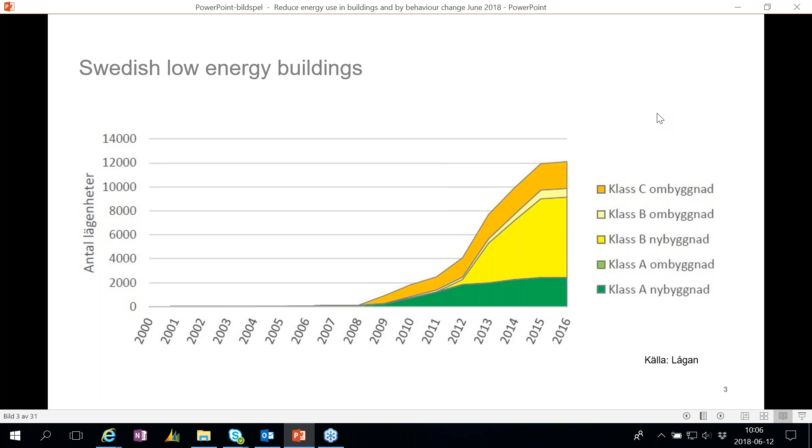The bright yellow and green here are A and B class new buildings, and when it comes to refurbishments, it's only a few up here. You can see it's a quite big increase, so you would think we are on our way, but if you compare that to the total amount of new houses, you can see it's only these down here that are actually new, low energy houses.

So only about 7% of all new houses built are being built as low energy houses. And of course, there is also the big part of houses already built, which will remain in the stock for another 50 years or so.

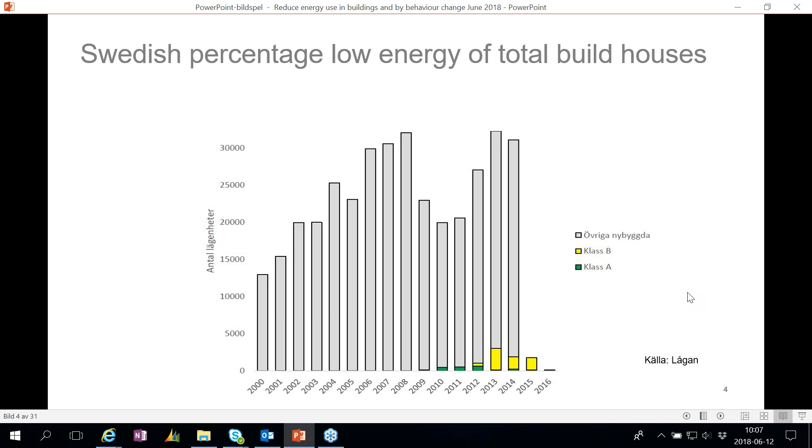We have heat exchange from the sewage water and a lot of new technologies. The passive house principle is actually from Germany from the beginning - you have well insulated walls and roof. You use solar both for solar heating to heat water, and directly in the winter - the architecture is made in a way that you can use the heat from the sun during the winter, but not in the summer, because then you need the shading, otherwise it gets too warm.

You use heat exchangers, so the heat from the ventilation air from inside is used again. You preheat the fresh air that comes into the building, and of course you use the heat from the persons living in the house, and lights, and stove, and everything.

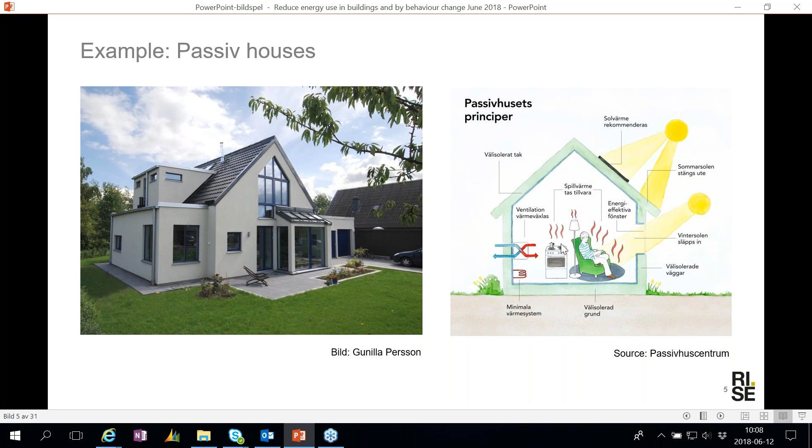But as I said, new building is one thing - then you have the possibility to make it right. The biggest challenge is of course the existing building stock, but it also has a big potential for reduced energy. So I'm just going to go through a few examples of what you can do in existing buildings to reduce energy.

The first thing is to look over the insulation, the walls and the roof, and to see if it's possible to add insulation. That can be done either by prefabricated building parts that you just add on the outside, or in other ways, site-specific ways of adding insulation.

Preferably it's done on the outside instead of the inside. That reduces the risk for moisture issues in the building.

Change the windows and doors - if it's old windows, that can be a very effective way to reduce energy use. And you would like to have as low a U value as possible. There are also actually ways to just upgrade current windows.

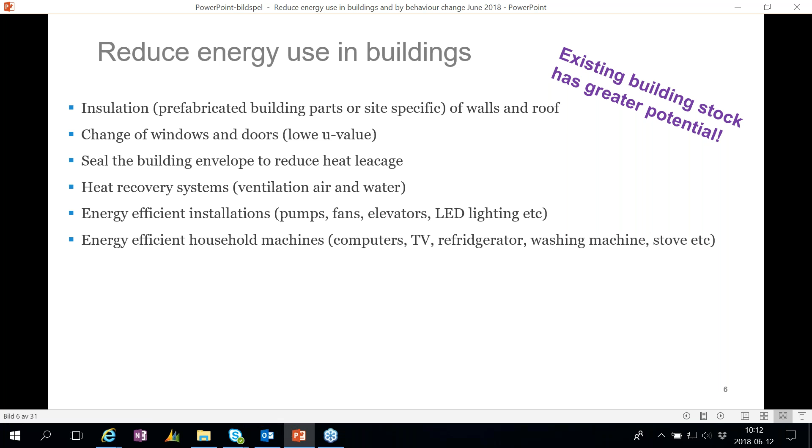Household machines - it's not always that the people owning the house are in charge of buying them, but when you buy new computers, TV, refrigerator, washing machine, stove, and everything, make sure that you choose energy efficient ones.

We talked about the insulation of the house itself, but you can also improve the insulation of the technical installations, like the water and ventilation pipes, so that you don't have energy losses in the wrong places within the building. The same thing with hot water tanks to store hot water for heating or showering - make sure that they are well insulated.

Monitoring and control systems are also ways to reduce energy use, to make sure that the right amount of energy is directed to the part of the building that needs it, and also to only use the energy when it's needed. The sensors are being better and better and cheaper, so quite a lot has happened on this part in just the last 5 years - it's actually easier now to monitor and get a good overview of the buildings.

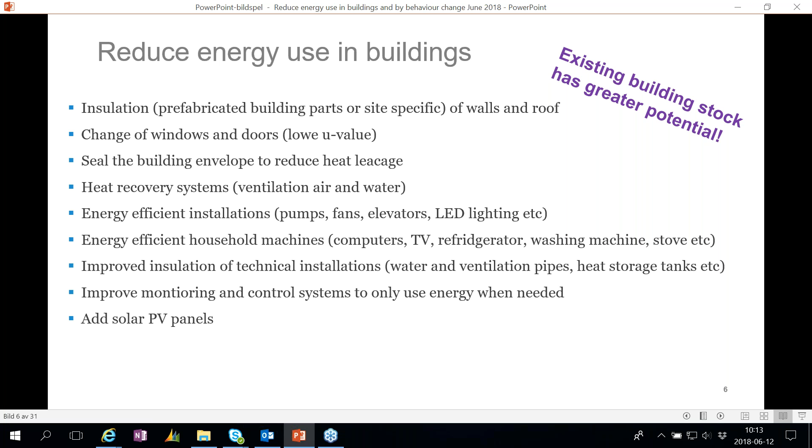And I also brought the PV panels. I know others are going to talk about PV panels later, so I'm not going to talk so much about that. I have two things that are really important when it comes to reducing energy use, and that is LCC and LCA.

I will start with LCA, which is life cycle assessment, and that is the total impact, the total environmental impact that a product or service has throughout the entire life cycle. That includes the raw materials, the enrichment of the raw materials, production, transport, use phase, and the recycling and the waste.

I think this is a very good thing to have in mind when you do an investment or choose something and compare different things, because one thing can seem to be a great environmental investment or installation, but if you look through the whole life cycle, it can actually mean that it's better to choose something else.

So bear in mind that you see the whole picture, and also think in the circular way. Is it easy to recycle? Is it easy to use the material again, and not just things that you have to throw away, that are really hard to recycle when they break?

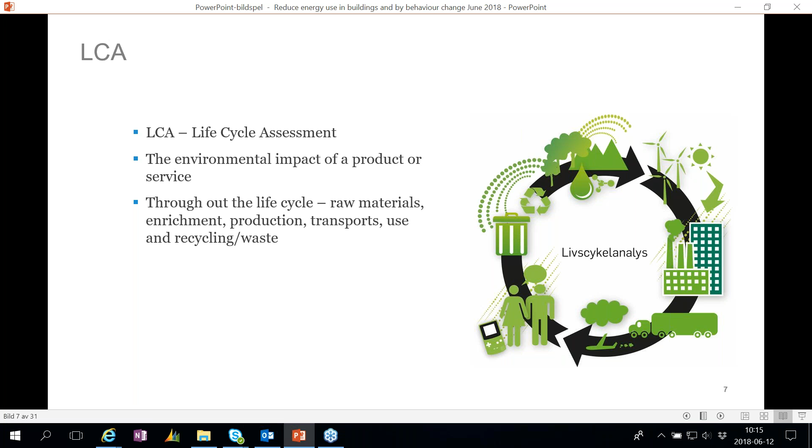The other part is life cycle cost, and that's a bit the same, but it's when it just comes to the cost, and that is the product or the service throughout the whole life cycle. This can actually be very important.

If I take the example of a pump, a water pump in a building that circulates the hot water, if you buy the cheapest one on the market because you don't want to spend too much money, and then you have a certain amount of energy used every hour that it is in operation, it will probably cost you more throughout the life cycle than if you would buy a bit more expensive pump in the beginning that has a lower cost per hour when you use it.

So always look through the whole life cycle, and this also includes the investment. You should also add education, services, repairs, and of course depending on your investment interest and payback and everything. So make sure you add the whole life cycle in your calculation.

This is to summarize a little bit about zero emission buildings. The first part is to use energy efficient and robust building construction and services.

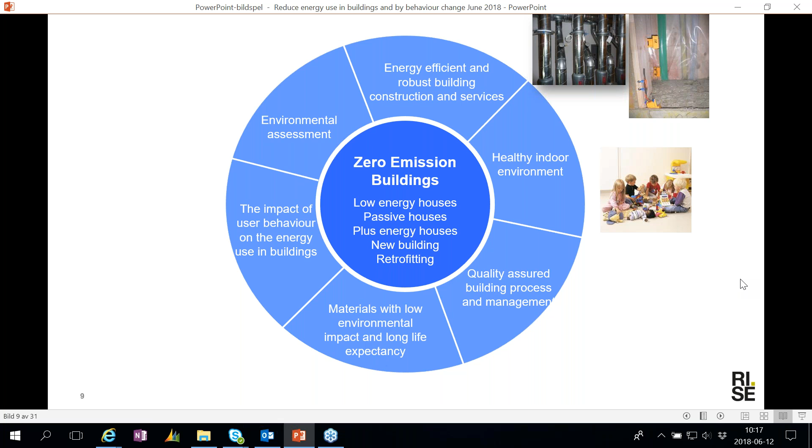To have a healthy indoor environment is a key element to zero emission buildings. You cannot reduce the energy by just making the house airtight if you don't add the ventilation. So to have a sound indoor environment is crucial.

One thing you should always think about is how to do the building process and management and the quality assurance of that process - to make sure to follow up if you set goals, how to follow them up during the building process, and also when the building is in use, how to make sure that you actually get what you wanted in the first place, to have a good solution for the building process and the management of the building.

When it comes to the materials, as I said, always look at the whole life cycle, the raw materials and the process, and how to be able to recycle them when they're out of use.

User behavior and the energy use in buildings, I will come back to that a bit later.

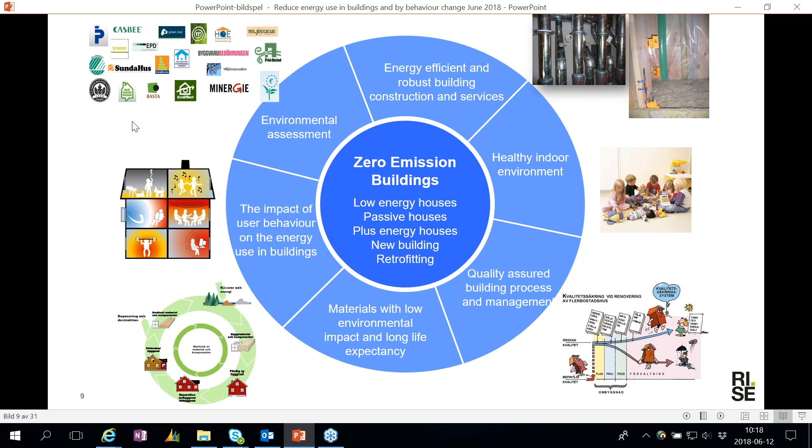I would like to give you an example of a project that we have done. This is a part of a city outside of Gothenburg called Kongahälla, and they wanted to see: is it possible to go from a low energy to a plus energy district?

This survey was actually done quite a few years ago, and now it's quite common to try to do this, but here they thought about how to use energy flows during the whole year by using solar, by using the excess heat from the grocery stores, from the cooling machines. You could add that to the district heating network and see how to move energy from different parts of the city to make better use of the total energy system, both heat and electricity.

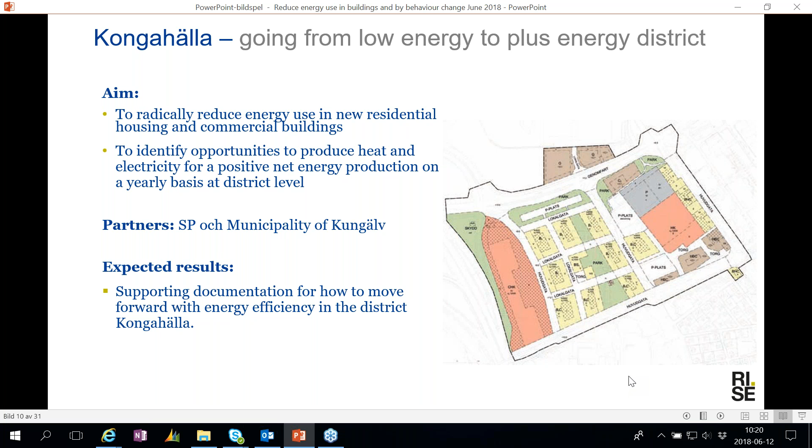So this is an example of how you can try to get a whole block of buildings to be more energy positive.

This is our research house in Borås, where we work. This is the main facility of RISE in the west of Sweden, and this house was built a few years ago within a research project. We have one building in Borås and one in Varberg. In Borås we have 4 artificial occupants, and in Varberg we have a family of 5 real persons. They are single family prefabricated wooden framed villas, designed to suit the Swedish market, so they are supposed to be energy efficient, but also cost effective and environmentally friendly. It was really important to have them attractive on the market too, so not too strange, so to speak.

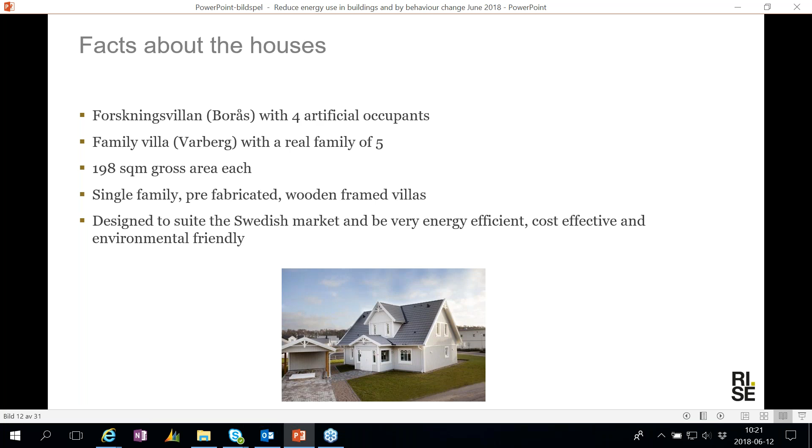We made some improvements on the building envelope compared to ordinary Swedish houses. This is the roof insulation, where we put some of the insulation on the outside of the wooden part of the roof. A lot of these improvements are to reduce energy use, but also make it more moisture safe. Since in Sweden we build a lot of wooden houses, moisture safety is really important for us.

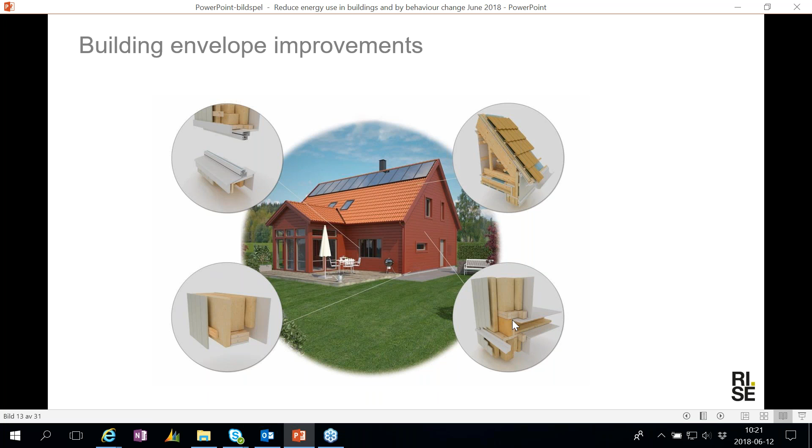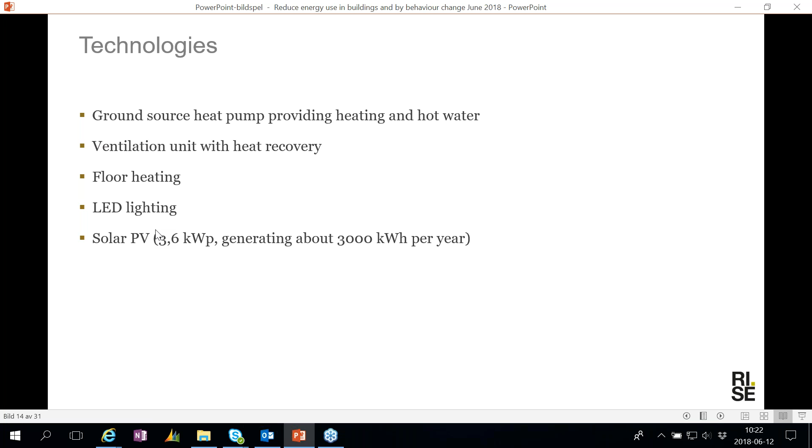We have a ground source heat pump providing heating and hot water. We have a ventilation unit with heat recovery that preheats the fresh air. There's floor heating, LED lighting, and solar PV that generates about 3,000 kilowatt hours every year.

What you can see here is that if you compare to a standard house in Sweden, we managed to reduce the annual energy use by as much as 73% compared to a standard house in Sweden. And the emissions were 735 kilograms of CO2 equivalents, with an 11 year payback time for these extra investments in energy efficiency.

This house will probably be functional for at least 50 years, so after just 11 years it's paid back.

Pretty much the same in Varberg, with a little bit higher energy use than in Borås. So 68% lower energy use, but also an 11 year payback period.

The lessons learned from this actually connect very well to the next part of the presentation: user behavior was a key point in low energy houses, and it can have a big impact on energy use. There was one event where they changed a setting on the ventilation unit, and that made the energy use skyrocket for a few months before we realized what had happened. So the technique has to be really user friendly, and the users have a big impact on how the total energy use in the building ends up.

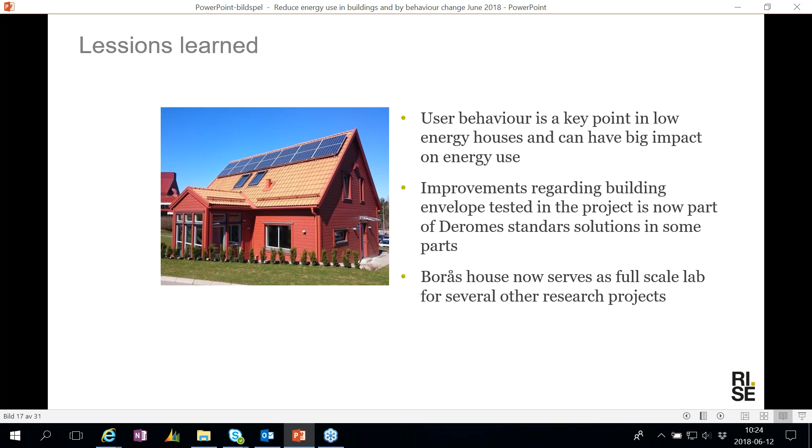Okay, so that was my first part, on the reduction of energy use. Should we give the opportunity to ask some questions or comments?

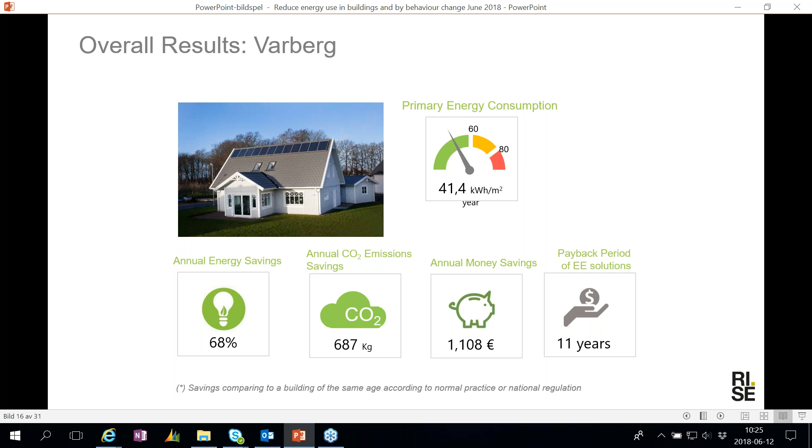Yes, perfectly. Okay, so I was looking at the energy performance indicator of that house, it's about 35-40 kilowatt hours per square meter. That is very low. In Italy, on the coast, the limit for new buildings now is 25, 30, but in mountain areas it's about 45. Which is your limit for new buildings in Sweden now?

The Swedish regulation doesn't count in the same way as the rest of Europe. We've had some issues about this within this project. So this is primary energy consumption, and that is 35. In Sweden, we use a bit of another way, but we have...

55 kilowatt hours, but it's not really comparable. But what you can say is, we should be able... wait, if someone is fast to calculate, 35.2 is 73% lower than the Swedish regulations. I haven't done that math.

Did you understand my answer? Can you repeat the last part? Sorry, I didn't understand. So no, you don't have the primary energy consumption measured like this? No, it's not presented like this in Sweden, so that's why I don't know it by heart. But if you calculate, I can do that later and give you the answer.

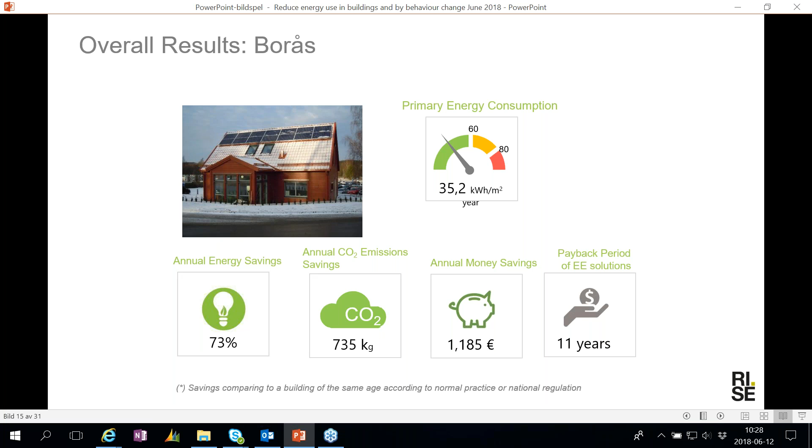Any other questions? Then I think we will move on to the second part about behavior.

I'm going to start by saying that this presentation is mainly the work of one of my colleagues, Carolina Hiller, who's doing her PhD research within this area. So this is mainly her findings in here.

The first part, when you talk about reducing energy use, who is the winner? We have both the building owner, who can do economic savings. At least in Sweden, it's really important to be environmentally and socially responsible. They can present a higher standard for the tenants, and they mostly have more satisfied tenants when they do energy efficient measures. But the tenants are also of course winners, because energy renovations actually raise awareness within the people living in the houses.

It raises awareness, lowers the costs, you use less energy, and you also get better indoor comfort, especially when you do measures like changing windows and air tightening, because that gives better indoor comfort.

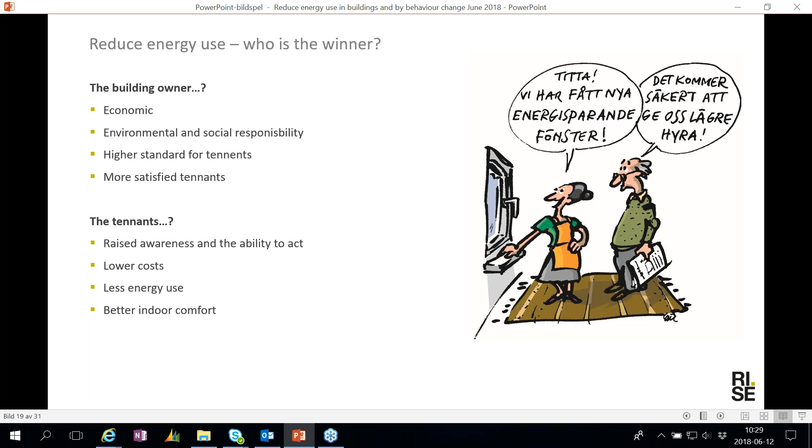The behavior will have a bigger and bigger impact as time goes by. These are calculations done for Swedish houses. In the current building stock, you can see that the biggest part of energy use comes from heating, with smaller parts from electricity and hot water. When you build new houses today, you can see the share shifts - the lower the energy gets for heating, the bigger the parts for electricity and hot water.

So when you've done a lot of the technical improvements that you can do, the behavior part is the big thing you can still do something with. I would say most actors start with the technical parts - insulation, improving energy systems, heating, ventilation, everything. Then you have the tenants that you need to somehow work with.

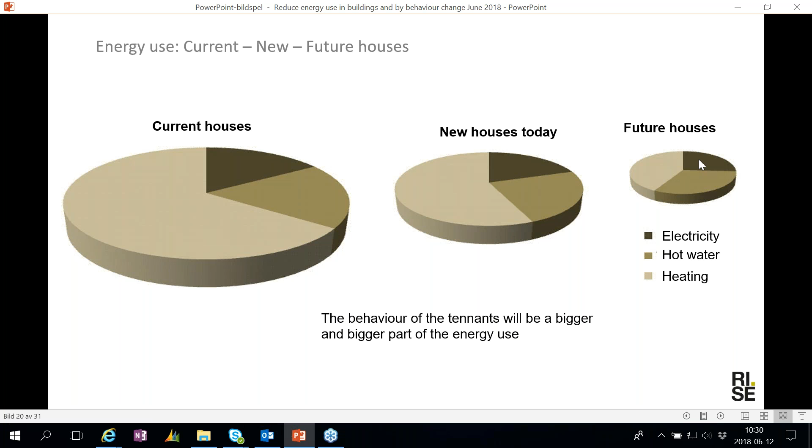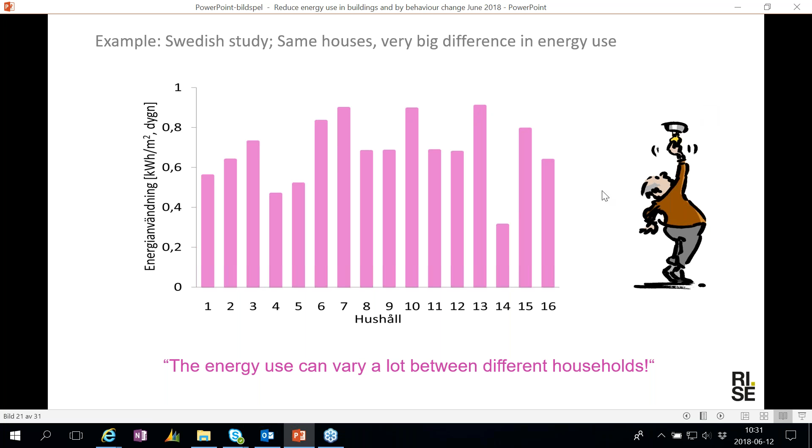This is one example from her study: 16 pretty much identical houses where we've done monitoring and questionnaires. What you can see is that the energy use varies a lot - almost a factor of 3 between the lowest and highest energy use, with pretty much the same types of houses. This is of course because it depends on the tenants.

When it comes to the use of hot water, the difference is even higher - it varies from 50 liters per person per day up to 200. So you can see here that it does matter, and it does vary a lot, even though the houses, technical installations, and everything is the same in these 16 houses.

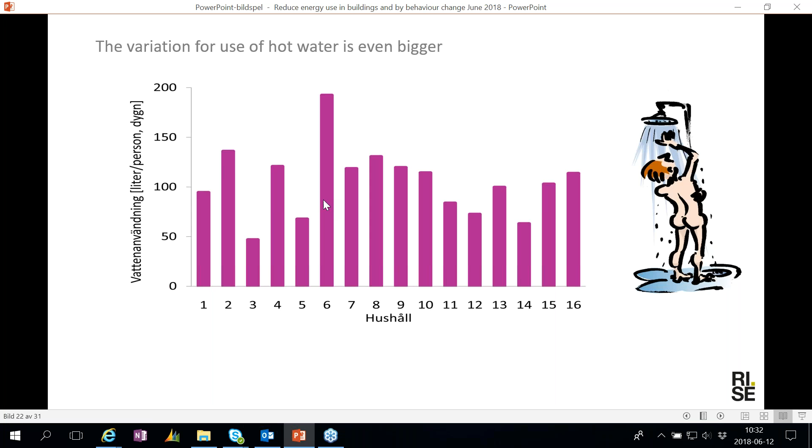Here you can see a curve on the variation from different months, over 3 years. This is a single family house, and they've done a lot of improvements, mostly technical, but that also brings awareness and behavior change in how to use the house. They've added a heat pump and changed the electricity radiators to hot water ones that can use heat from the heat pump to heat the house.

They've also done some renovation measures, so you can see from 2013 down to the yellow, which is 2015, that they've actually managed to lower the energy quite a lot. During these summer months, it's actually the renovation itself that makes the energy use still high, because they've used quite a lot of power tools powered by electricity.

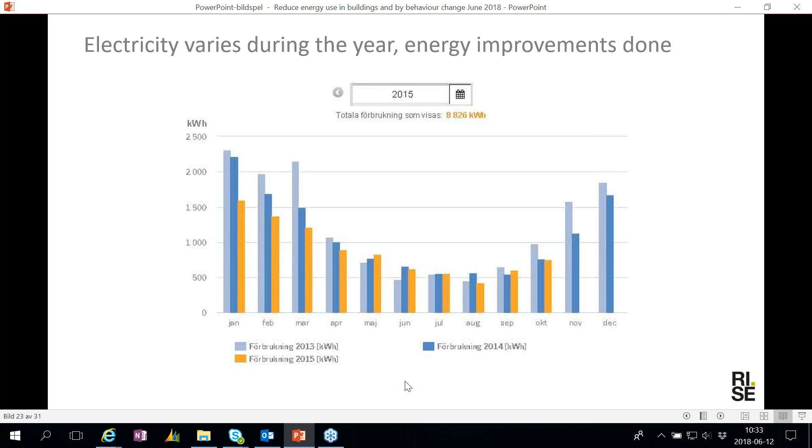So does it really matter if you change your behavior? If you look into different estimations of how much is actually possible to save, it's as high as 20% of the energy use, and that can be quite a lot. You can divide it into things that don't cost anything or very little, versus some stuff that means a bigger investment.

Different measures that rarely happen, and that happen more often. So the things to look into when it comes to low cost or no cost at all, and that you don't do every day, is to change to LED lights.

If it's possible to lower the indoor temperature, only 1 degree lower can save as much as 5% of the heating cost, depending on what type of energy you use. Improve the air tightness, and also when you install new water taps, you can choose the energy efficient ones.

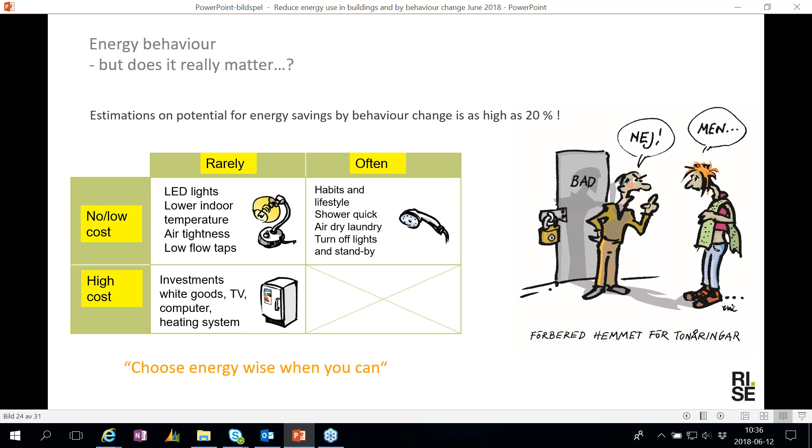There are quite a few different examples of these in Sweden, but what we've seen doing research is that they can be fun for the first weeks or months, maybe for some, but you need a more sustainable way to keep it going, because you don't change your behavior long term just by adding one of those displays or an app.

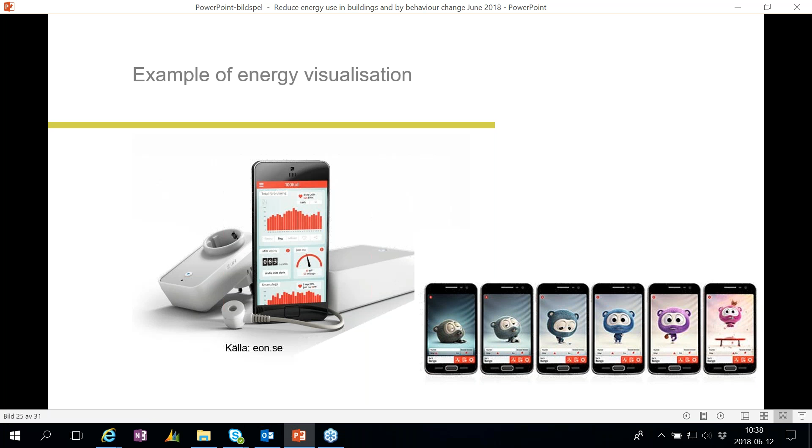And we've actually done some projects on that. This is an example of a project we did together with nurseries for really young children, age 1 to 5.

We developed a tool - the electricity thief, you can see him here - and he has a song, and there's a game on an iPad that the children can use, but there's also material that the teachers use.

We've done monitoring both before and after using this, both short term and long term. What we can see is that adding this guidance material for the nursery teachers was much more effective than just using the app alone. So adding ways to work with people in the organization was the key to sustainable behavior in energy.

And reducing energy use - we also made one example of behavior change in a work environment, in a project called BeyondViz, where we started to look. This is a picture of an office where you can see all the screens are on, but there's no one sitting in front of them.

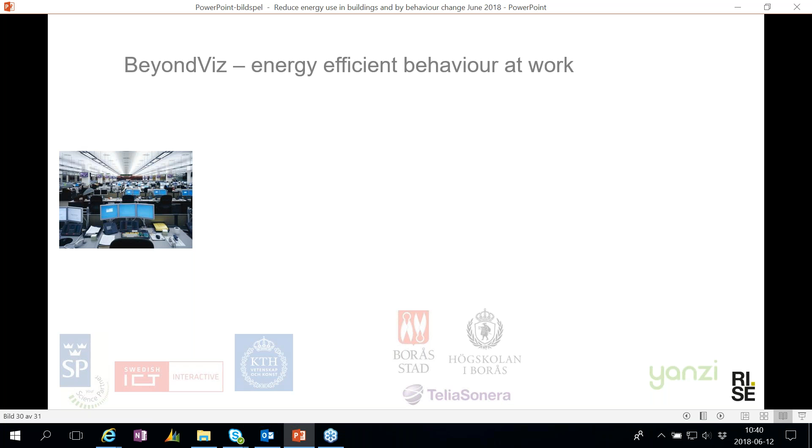This is quite common - actually quite a lot of energy is used when no one needs it, when it's not doing any good, so to speak. So that was what we wanted to target, because of course you need to use your computer and your work environment, but it's the excess energy that is not needed.

So we've created two gadgets, you can say. One of them is a screen where you can see how the energy measure compares to different days and different parts of the buildings. And this is actually our lunchroom in Borås, where we have this big super graph that moves up and down when the energy use in the building varies. So it's also a very visual indicator of the energy use.

But as I just said before, that is not enough. You cannot just only add these apps and things that people will change, because you also need to have the employees with you. So we arranged different workshops where they could discuss and try to see what they could do, what was easy to do, what was a bit harder, and what they needed.

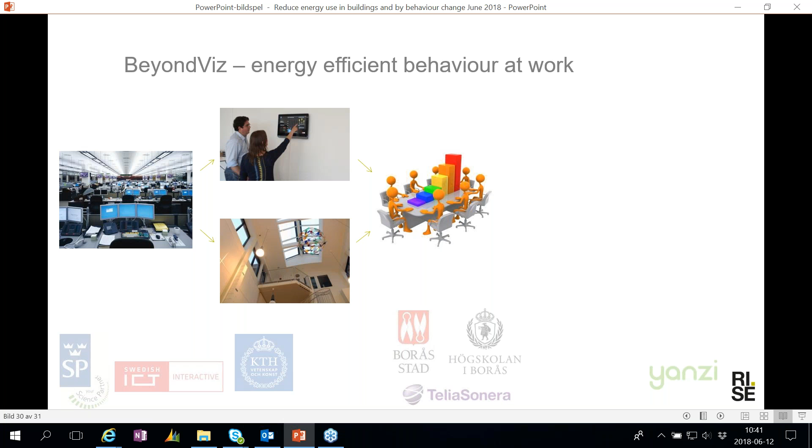And we also involved all levels, all the way up to the manager of the office, to make sure that this was implemented all the way. So this was an example of these workshops where we worked with them. And doing this, we could also see that we got a greater energy saving than we did when only adding the visualization measures.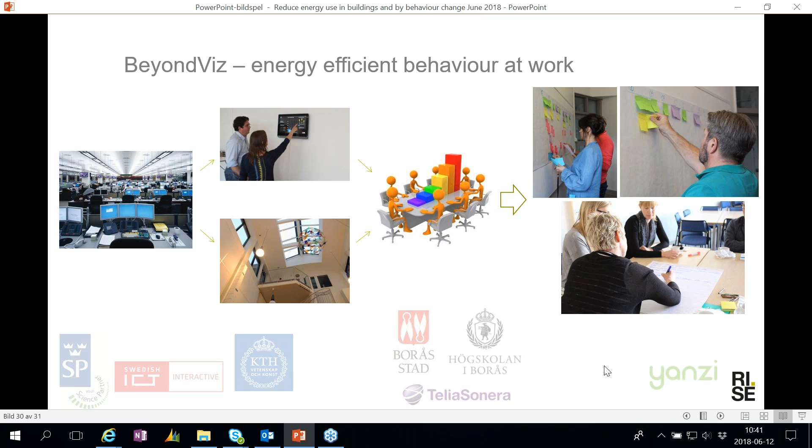So that was pretty much what I was going to say, but I will be happy to answer some more questions. Thank you very much, Lisa.

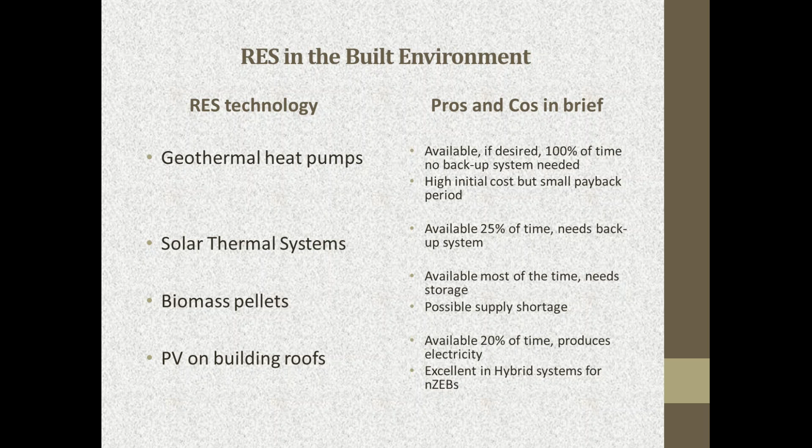I will give some examples from some projects that have been done in Greece. This is a good thing. Everything I'm going to be discussing now is from projects done in Greece. Some of them were paid by the EEA2, that is the EEA grants.

We have had geothermal heat pumps in administration buildings of municipalities, in educational buildings at schools, nurseries, universities, cultural and social activity buildings, elderly homes, health centers and hospitals, museums, sport halls, swimming pools, and other municipal buildings.

That means that geothermal heat pumps can be employed and applied in all kinds of public municipal buildings. With the same system, you can have heating, cooling, and domestic hot water, with savings of over 50% compared to natural gas in primary energy, and around 60% compared to oil. The best combination would be with solar thermal for domestic hot water and PV on rooftops, leading to zero energy buildings.

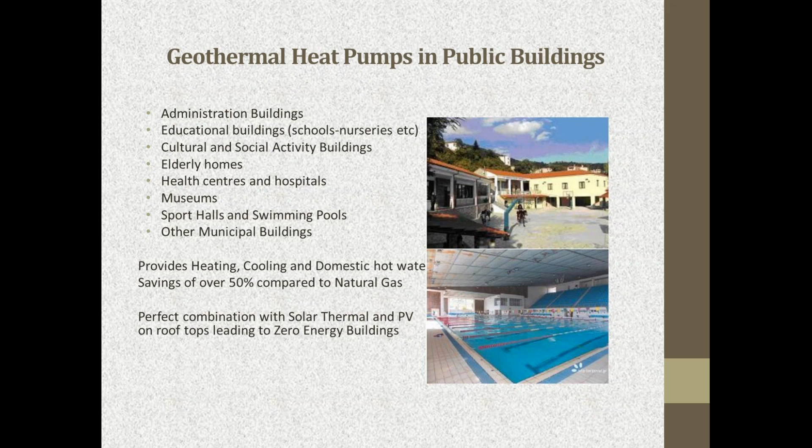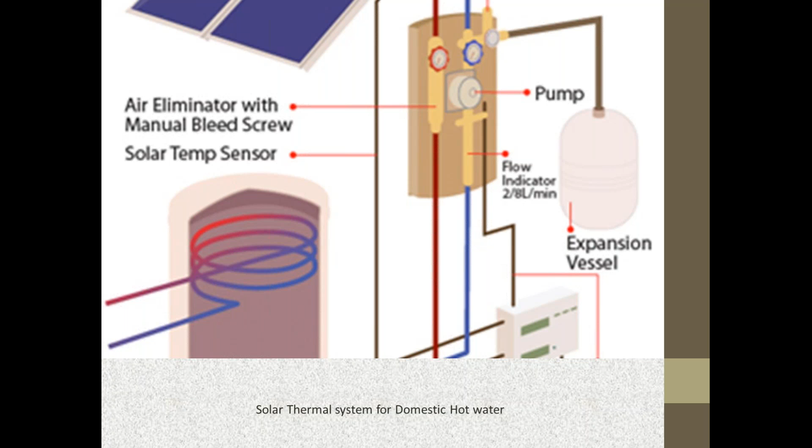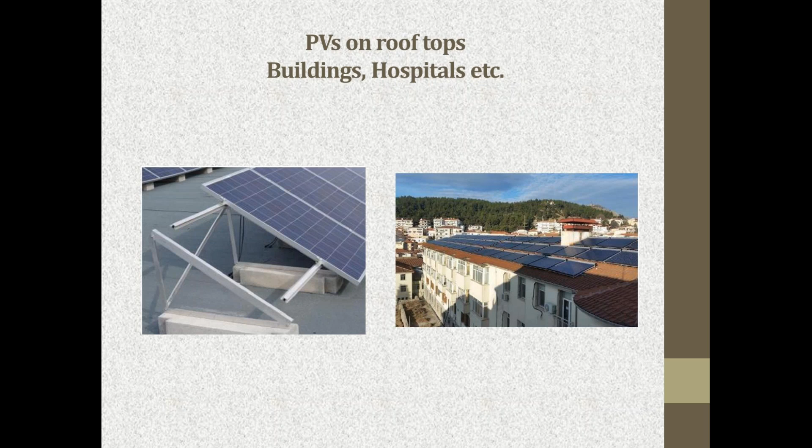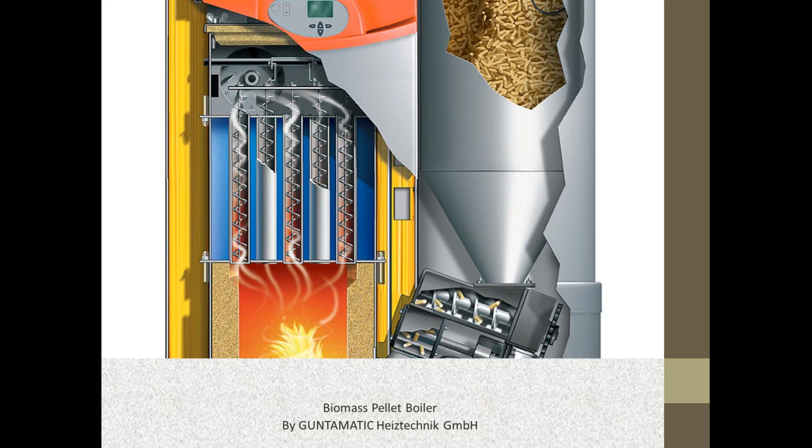Again, biomass pellet boiler - I have this slide showing the initial principle of operation. Unfortunately, in Greece municipalities don't use much biomass pellet at this moment, but in many other countries, like Austria and Sweden, you could have biomass pellet boilers providing heating to buildings.

Here I'm going to talk about the geothermal heat pump district heating system. It's a quite big geothermal district heating system with 2 schools, 2 administration buildings, and a hospital, also hybridized with rooftop PVs on the hospital and solar thermal for domestic hot water in the administration buildings.

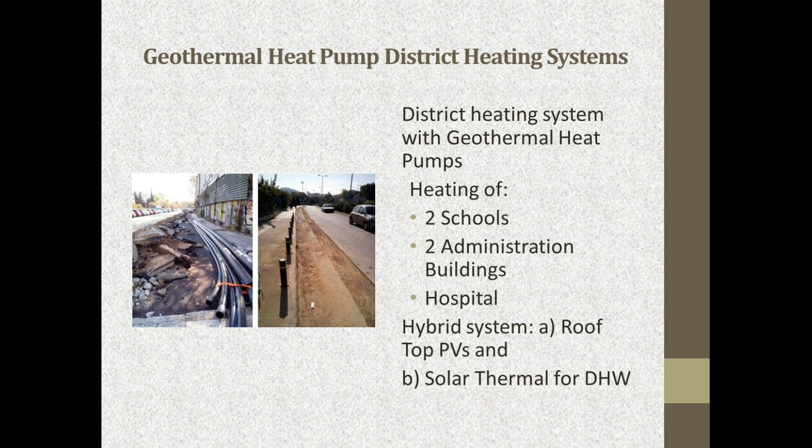This district heating system, where you can see the construction of the geothermal heat pump, and this is the plan, is in Athens - in one suburb of Athens, Nea Ionia - meaning that you can really get geothermal heat pumps and hybridized systems inside the cities.

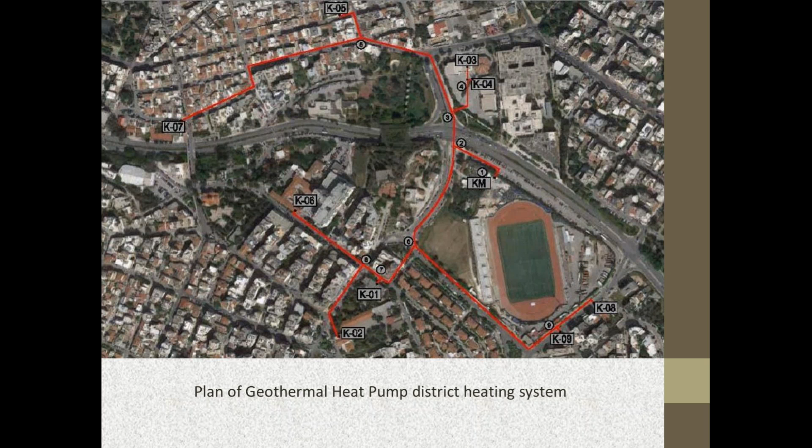It's not so difficult to get inside if you have a good plan. Here you can see it's a 2-3 kilometer district heating network within Athens. So nobody can say that you cannot really put it in a big city.

Another way to take advantage of RES could be transportation driven by PVs on rooftops. This is again in Athens. We have a system with a PV on a rooftop and a charging system, an electrical charging system for a municipal electrical bus of Athens, and also for some motorcycles which are rented by the municipality to users.

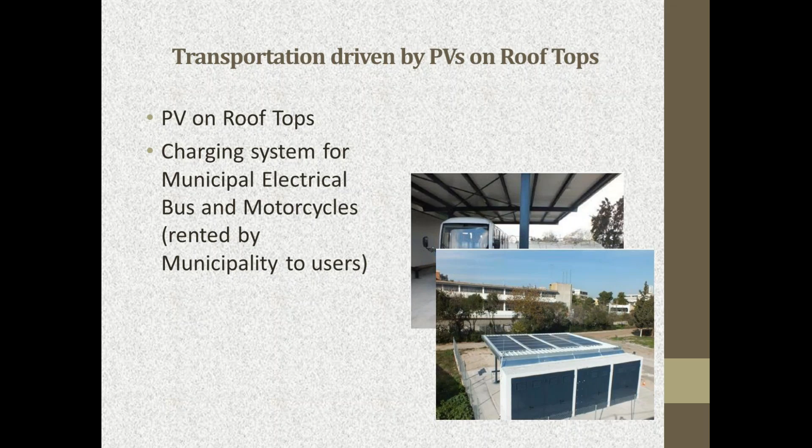This is the PV panels on a hospital rooftop. And here is another quite big project in North Greece, where several buildings belonging to municipalities - one is a nursery home, the one on the left. The other is a nursery home again in another little village. Underneath, there is a cultural center to the left, a small convent belonging to the church in the middle, and the elderly's home in Alexandroupolis on the right hand side at the edge.

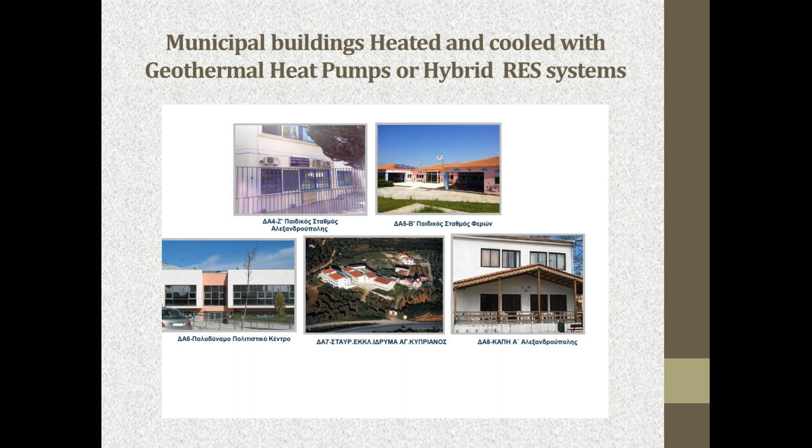Here you have geothermal heat pumps mainly, being hybridized with biomass, with PV, and also with solar thermal. Finally, in the city of Grevena, in the north part of Greece, we have a system combining thermal solar, biomass, and also some PVs.

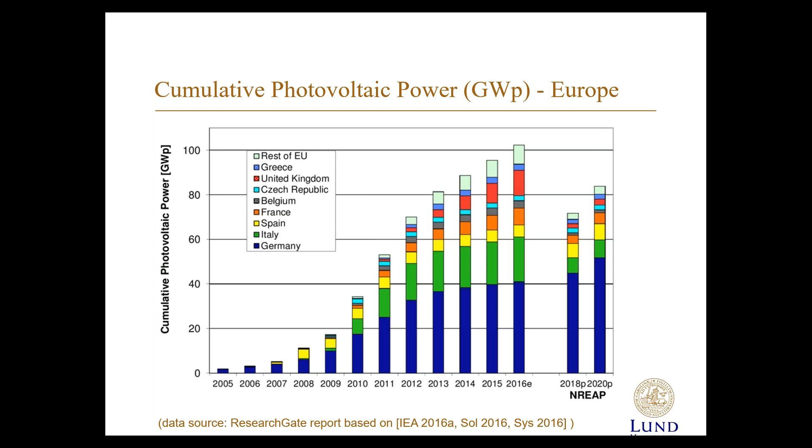And if we look at the PV trends on a global basis, we see huge solar parks being installed all over the world - in India it's huge, in Chile, in the US. Yesterday I read news about an installation in Egypt, and one of the reasons was also to get away from the oil dependence of other countries, being more independent. But also we can see empowering of the people, small scale installations in South Africa, Nicaragua, India, in many places around the world, where people go together and install PV on a small scale, which could also be seen as part of being democratic, where you can influence your own electricity production.

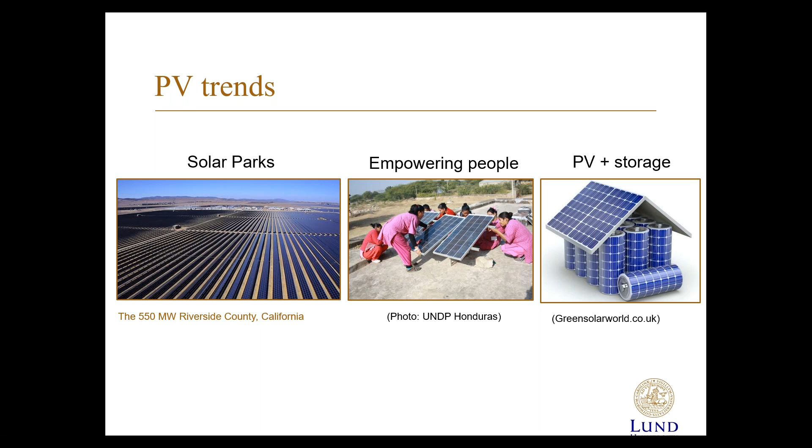But also we see an increase in PV and storage, a lot of technology development in here, but it's still expensive though. And this could also be part of this independence from both other countries, but also large enterprises or large utilities. So let's take a look at business models.

So what is a business model? I would say I use it as a mental lens of how firms do business - basically how they create value for the customers, how they deliver the value for the customers, but also how they capture that value, basically making money out of what they've offered their customers.

So we have the value creation, which is for the customer. How do we make this value for the customer, in terms of their interests, needs and wants? The customer interface relates to the interaction with the customers, so what kind of communication channels, the relationship with the customers, etc. The business structure is related to the organization, how you organize in order to deliver that value to the customer. And of course, the revenue model, how do you make the money?

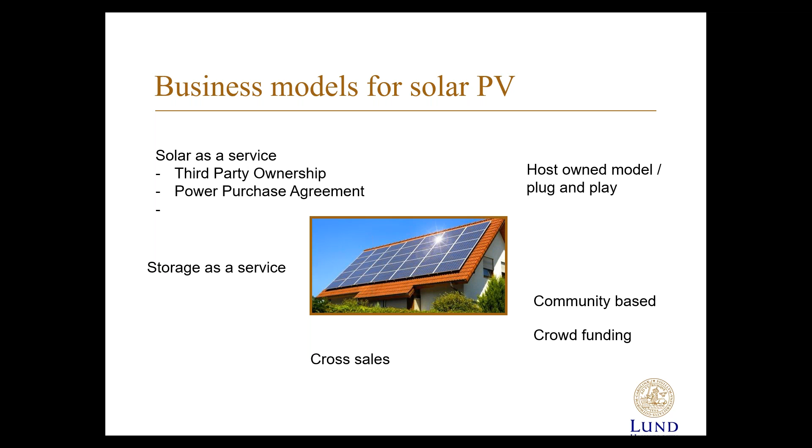So now we'll go into the case that we've been studying of a third-party ownership model going from California to the Netherlands. We'll have a look at what characterized this business model.

First of all, the value proposition, what they offer the customer is very simple: turnkey solutions with no hassle, and they directly save money on the energy bill. No upfront cost. It's basically leasing. You wouldn't say no to that offer.

In terms of the customer interface, it's a very professional, very service-oriented experience for the customer. But they also use IT and remote sales processes, meaning they don't have to go out to the customers all the time. They also use what we call lead generators, partnering with other companies that can find potential customers, at a bigger store for example.

In terms of the business structure, they've been using an ICT-based platform for customer acquisition, getting it all the way through the sales process to get the contracts, but also for quotes and design of the systems. Both the design and sales are very standardized, with different groups of people working very dedicated on what they're doing.

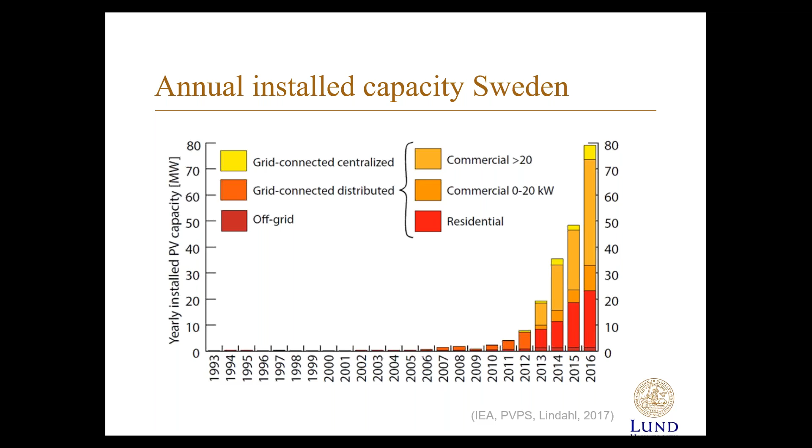But if we look at the installed capacity in Sweden, we can see that from 2015 to 2016 it more than doubled, and I think in 2017 it doubled again, which is very, very good. But if we look at other countries and compare, we sometimes talk about diffusion, which means the total installed capacity per 1,000 people.

Sometimes we talk about this persona - I know that most of the customers is an almost retiring man who is very into technology or engineering, tech savvy, who has the money and maybe some environmental interest for the future generations, for the grandkids. So you would expect Sweden to be very successful in this.

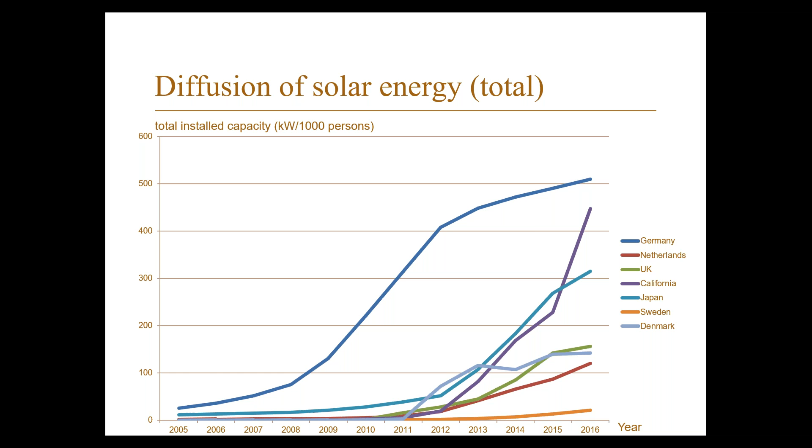So what we did was contact the 30 biggest utilities in Sweden offering PV, finding out that only half of them actually had a PV offer. And basically, for the main part of that half, you have to do the work yourself - so measure up your roof, take photos, and all the details about technical installations in your home, etc.

So meaning if we want to expand, we also need to understand more average customers who might not be tech savvy, and why people do the things they do.

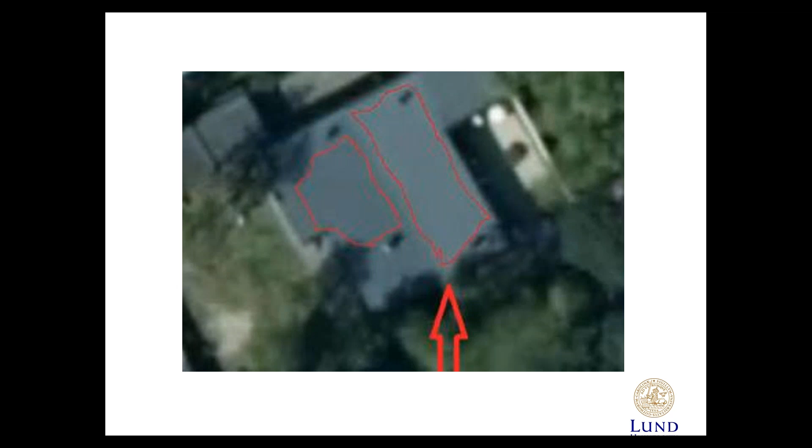So by that, I also want to say that I think it's important to think small scale with personal contact and service, and the entrepreneurial mindset within this field I've seen to be very successful. But also finding alternative solutions for financing systems - for example, going to investors and convincing them about the low risk of investing in PV, but also crowdfunding and this community energy sharing example that I mentioned. So thank you.